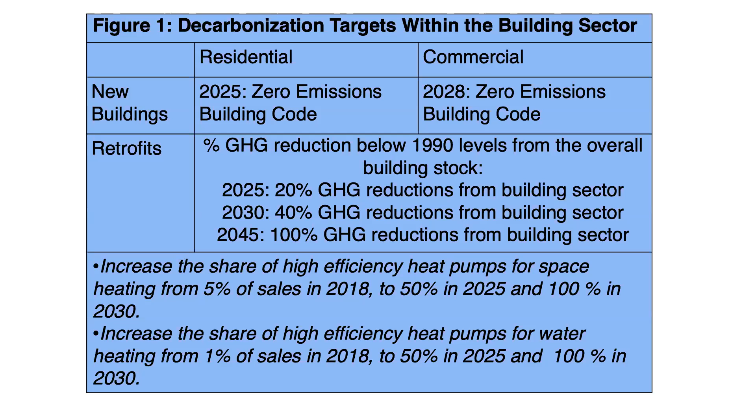Inherent in that was a recognition that two of the most important technologies, for space heating and for water heating, we're going to need to dramatically increase the share of sales for high efficiency electric units over gas units, so that by 2030, we can't really be expecting to be selling gas units in California and still expect to meet our 2045 carbon neutrality goals. So we adopted similar goals and recommended those to California for 100% of sales for the high efficiency electric models for those two end uses.

In exploring those numerical goals, we also recognized that a number of other more market-based goals were going to need to be achieved to reach those targets. You can see them up on the screen, but in short, it was significantly increasing awareness of the benefits of electrification, ensuring that customers and then delivery agents, such as builders and installers, are having a good value proposition from decarbonization. That the supply chain is a partner in this process, and that we're adopting clear standards with a viable timeline, so that the supply chain has time and the ability to be able to ramp up in order to meet those targets, and that we've gotten barriers to the supply chain out of the way as well.

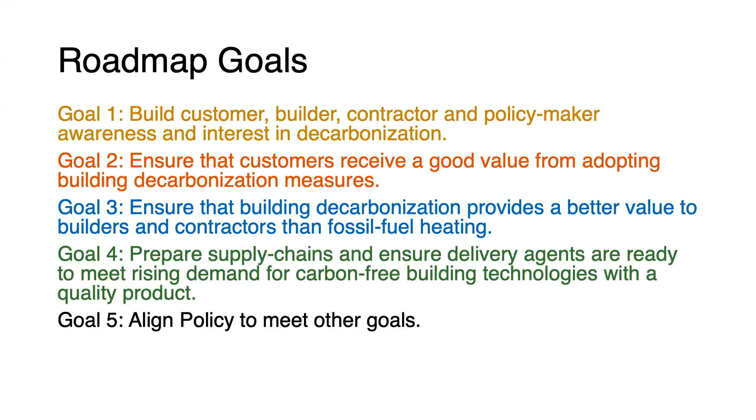Lastly, we're aligning all of our policies so that the four previous goals are able to be met and we don't have policies conflicting with each other. This webinar series fits clearly under that first goal, and it's one of the various attempts that the coalition uses in order to increase awareness. This webinar series is generally focused on professionals that work in this field in order to bring in some of the top thinkers, top doers, top companies and organizations that are working at the cutting edge of building decarbonization, to let them talk to the community about what they're working on and where we're going.

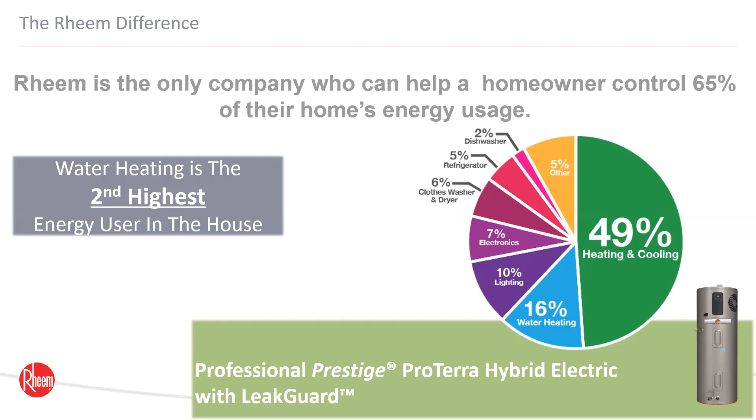Water heating - not the sexiest topic in the world. Consumers usually only consider their water heater when it leaks, so that's once every 10 years. But really a big importance should be placed upon the water heater because it is the second highest energy user in the house when you look at a national perspective.

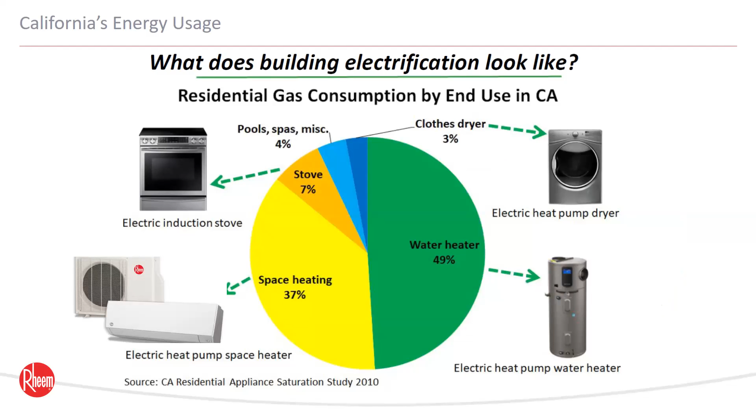When you flip it over to the state perspective, people move to California because it's nice - they don't need to run their HVAC very often. So all of a sudden, the water heat and the HVAC kind of flip. Water heating being the number one energy user in the house, now more importance needs to be placed on that technology to make sure they're saving money on their energy bills and aligning with the electrification goals that the state has.

Also, Rheem launched our sustainability goals last year. So we have a quick video just to explain what Rheem is doing in the marketplace and how we are partnering with our trade allies and with the builders on a sustainability message point of view.

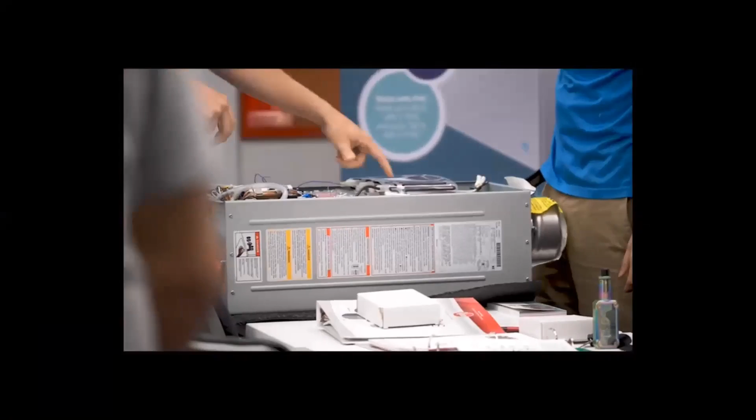At Rheem, we are proud to make bold commitments for 2025 to dramatically reduce our impact on the environment. We are committed to addressing the labor shortage and increasing training needs facing our industry, and we see a future with zero waste in the use and manufacturing of our products. That's why we are designing for zero waste. We are reimagining our products to slash greenhouse gas emissions, refining our processes to drastically reduce our carbon footprint and landfill waste, all while training plumbers and contractors on how to install, monitor, and maintain sustainable products to perform as efficiently as possible. From the very beginning, we've integrated sustainable thinking into everything we do. And as the leader of a global family of brands, we will deliver greater performance while contributing to something greater than ourselves - creating solutions that truly make a difference, delivering a greater degree of good.

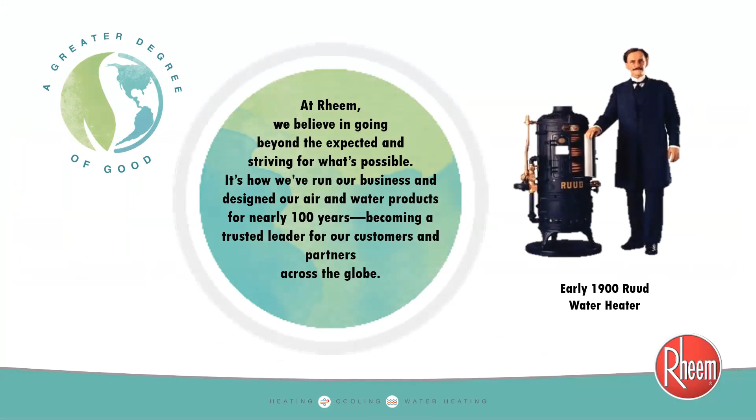So again, all those goals align with our 100-year birthday coming up in 2025, and pretty aggressive goals. Obviously we were on a good track.

We have 4 ILCs in the United States. Those are innovative learning centers where we bring in about 20 contractors at a time, providing 2 sessions a week to 40 contractors. We give them a hands-on experience with efficient product, how to install it, how to sell it, how to service it.

And of course, as COVID has caused us to react to that, we've pivoted quite well to a virtual platform, very much like this. So we have our master plumbers still have contact with thousands of plumbers every single month. They do that on rheemtraining.com or with our sales agencies or assets like myself, regional assets for Rheem.

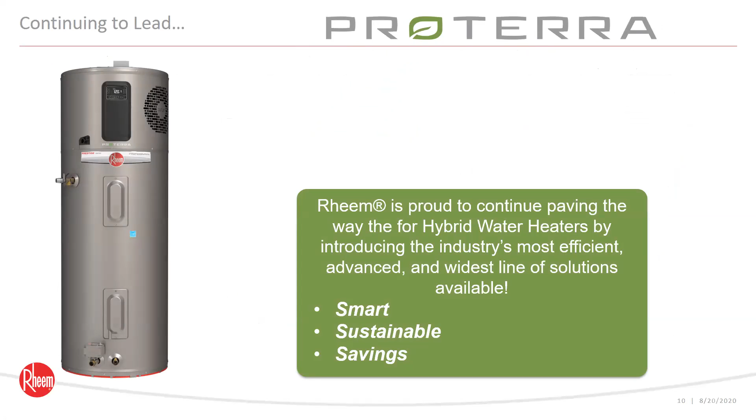So obviously this product aligns very well with our sustainability goals. It's going to reduce that carbon by 75% because it's going to use 75% less electricity. So really this product has 3 pillars of attributes that we want to point out. First, that it's going to be smart. It's going to be sustainable, and it's going to provide savings for the homeowner.

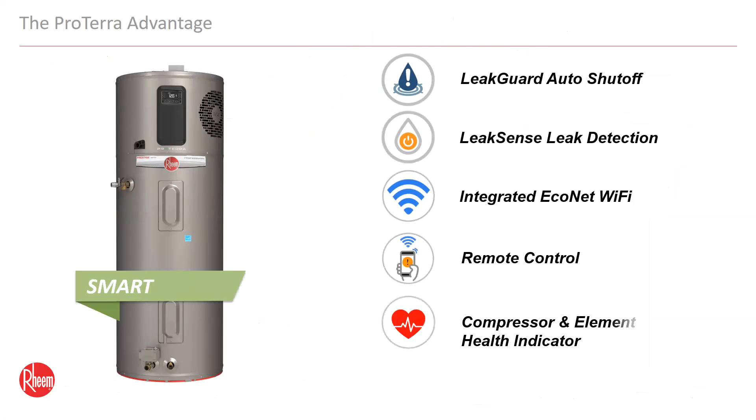So this is already our 5th generation heat pump water heater since 2009. We've obviously taken great steps in efficiencies and consumer features to make this product very desirable once a consumer gets wind of it. We've had leak detection in the past with our units. We've taken it one step forward and added an integrated shutoff valve. And really what that does is it detects the leak and prevents the leak.

We put integrated Wi-Fi in every single unit across the line. That way they can have remote control with their phone. They can get compressor and element health alerts. That way they can schedule planned service calls instead of emergency service calls, which tend to cost a lot more.

And a new feature is also the hot water availability. Homeowner can get on the app and figure out if they have enough hot water to take that last shower, which is a nice feature.

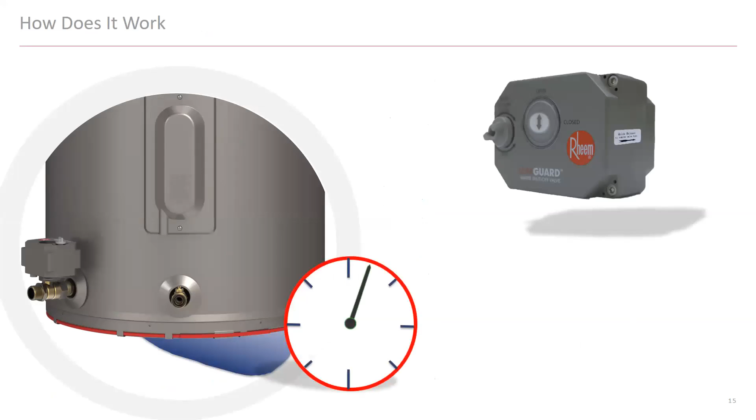So on the consumer side, anybody that's had a leak in their garage knows that that peace of mind is pretty big. So if we can actually prevent a leak in a tank to only about 20 ounces of water by creating a vacuum, it's something of value.

So this is really just to demonstrate how that works. Once water hits the drain pan and hits that cord that's wrapped 360 degrees around the bottom of the unit, it will turn the shutoff valve, have an alarm go off on the control board, and the homeowner will get an alert on their cell phone to come pay attention to that system.

So again, a good notification, good peace of mind for the consumer. And when we do consumer interviews, this is something that's very, very highly thought of.

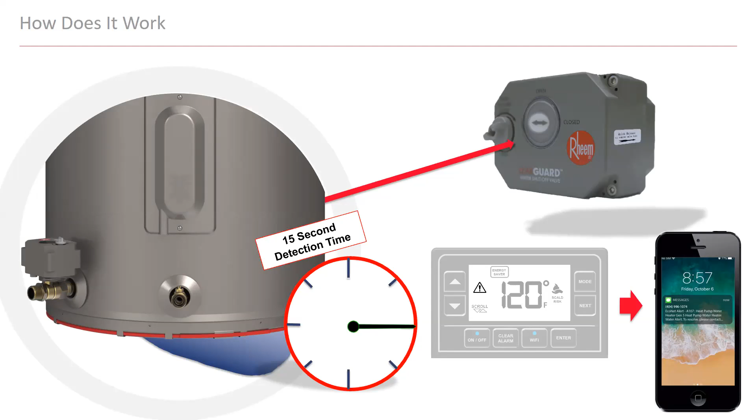We also changed the board. The previous board, which was a touch screen, tended to be a little bit harder to use, from our consumer interviews. So we changed it to a push button, which allows for easier access and functionality. So there's just some of the controls that it has now.

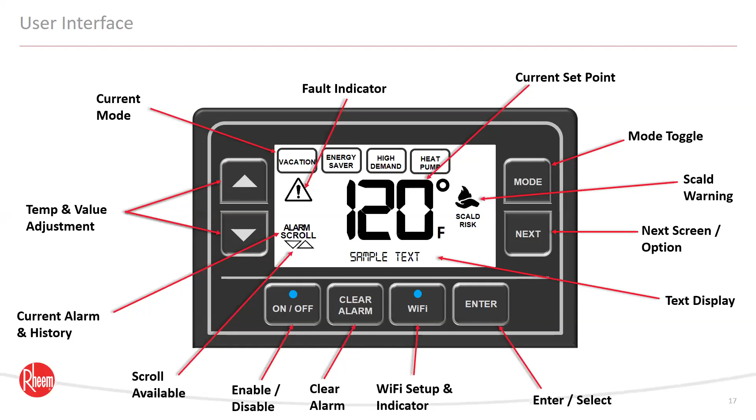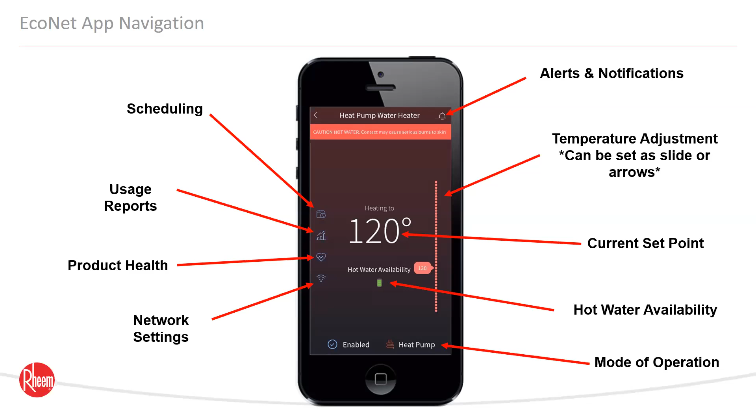On the app, we're continuing to update this app and be able to add features and benefits that the consumers are looking for. Of course, you can schedule this for time of use, which I'll get into in a little bit. You can get energy usage reports. You can change the mode and the temperature. And of course, you can get those product health alerts, which are pretty handy.

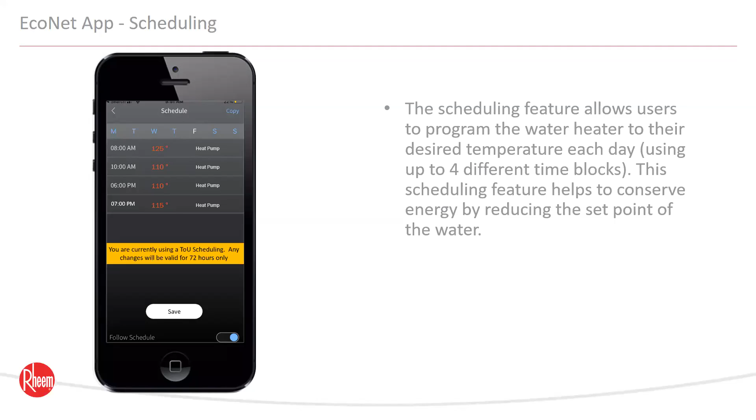Scheduling, California will be in some sort of time of use scheduling in the near future, if you're not already, if you have solar on the roof. But this is going to maximize really the savings for a high efficiency product by allowing the consumer to program it like their HVAC system. So they know that in between the times of 4 and 9, that electricity is going to be very expensive. So they can run their own in-house demand response program with the EcoNet app. Again, usage reports just show how much money they're saving on a weekly, monthly, or yearly basis. And this is what those health alerts look like.

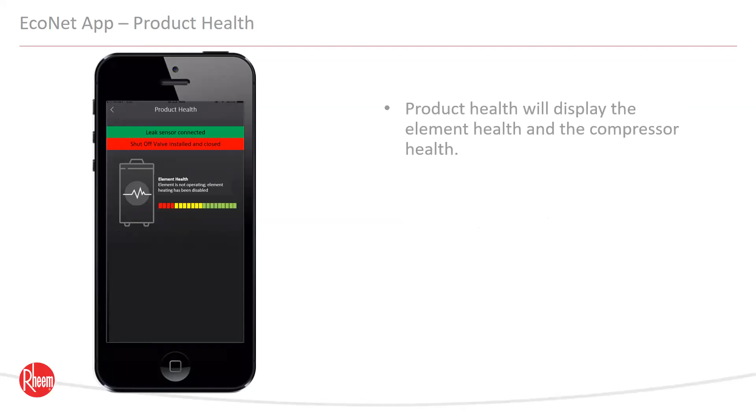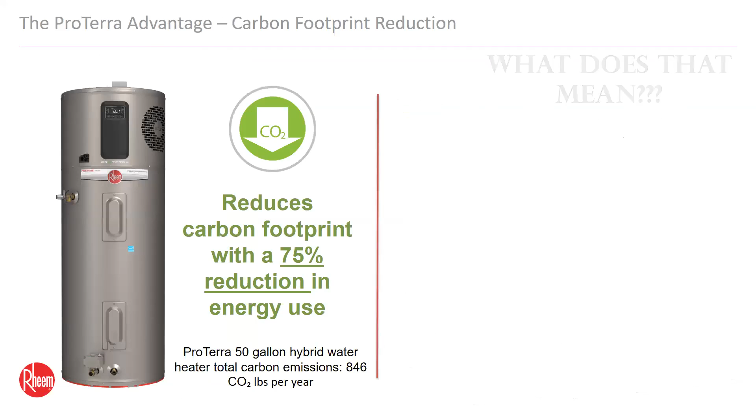Second pillar is that it's a very sustainable product. It's going to be the highest efficient product in the market with up to a 4 UEF. And again, as energy production gets cleaner and cleaner, both sources will drive down to zero once California is on 100% renewables.

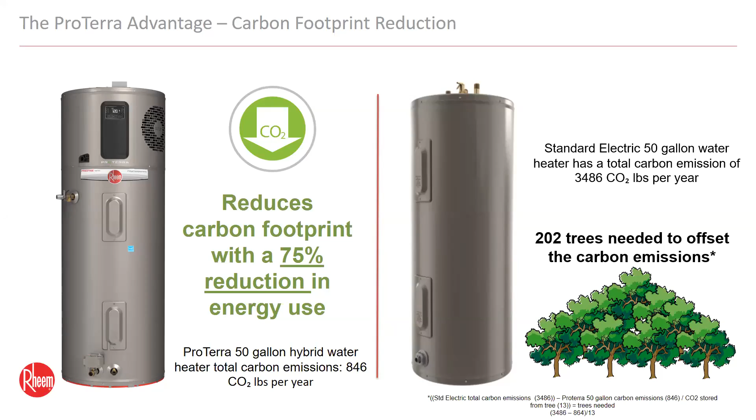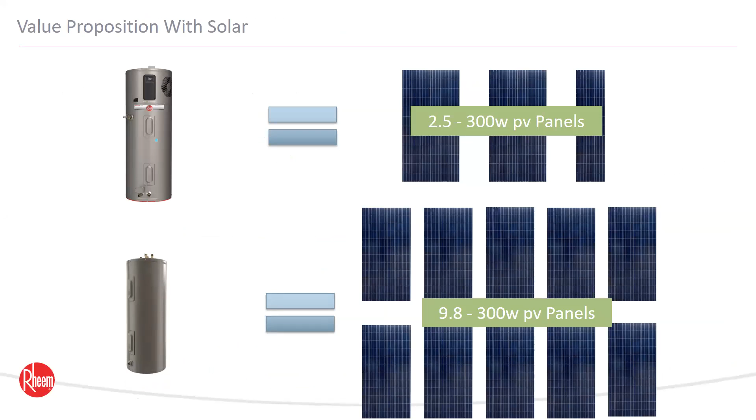When you take a look at it in solar panels, it's 2.5 panels to power a heat pump water heater as opposed to 10. So unless you're willing to pave your sidewalks with solar panels, this just makes a really easy transition, especially as homes are starting to require solar on the roof for new construction.

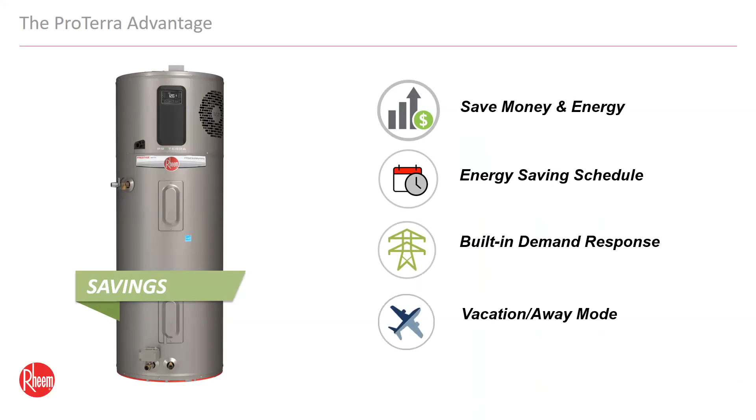And of course, the real reason people switch and change technologies is the savings it's going to provide. From a national perspective, just looking at a new water heater as opposed to a heat pump water heater, it's going to save on average, net national average, about $300 a year.

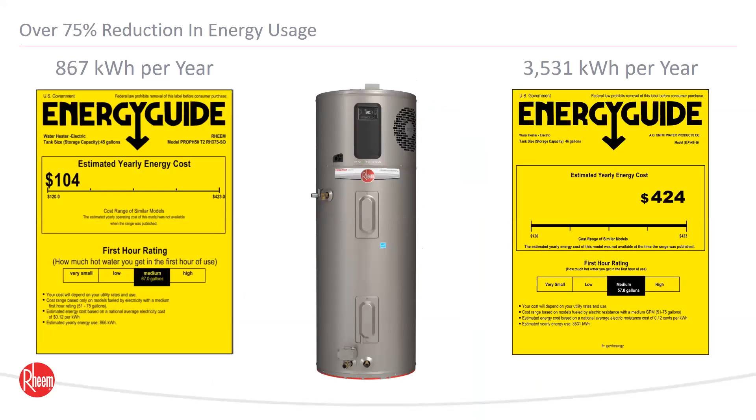Of course, California is not the average. Take a look at all technologies based on a low TOU rate and the gas rate that's out there. Because of its ultra high efficiency, this is the most affordable option to use.

Now there are some assumptions there. I am programming that water heater around time of use, and I had to do the same thing with the electric tankless and the regular tank type products. But this is going to offer a lot of savings from the get-go, not only for current users of electric tank type products, but also gas products.

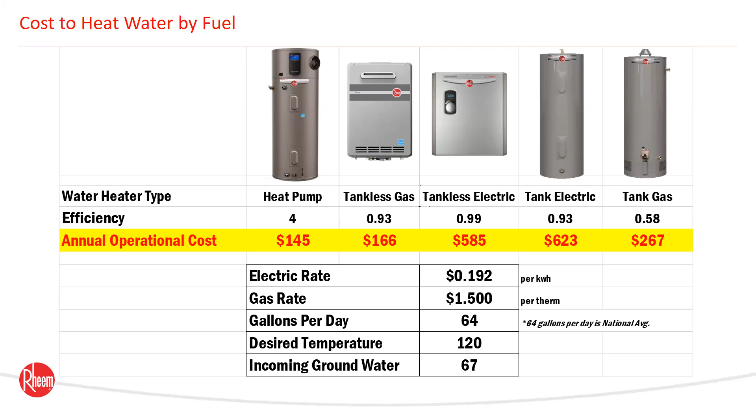If you have customers out there in propane territory, this is obviously a no-brainer for them. They're going to have an immediate impact on savings, and they should be able to see a break-even point within a couple of years by switching to this technology.

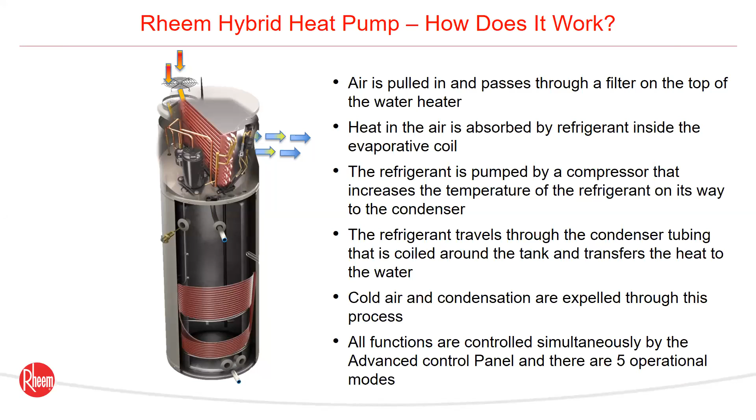That refrigerant is compressed and superheated, and exchanger coils are wrapped around the outside of the tank in order to exchange that heat. And that process of moving heat, not creating heat, allows that system to be over 400% efficient.

It's a very common process we use in a lot of different applications throughout the house and in our cars. So this is not a scary technology at all. This is something everybody touches, feels, and uses on a day-to-day basis. It's been around for a long time. If you look at how many refrigerators are sitting out in the garage keeping beverages cool, I bet there's lots of them, and they're probably 20-year-old refrigerators.

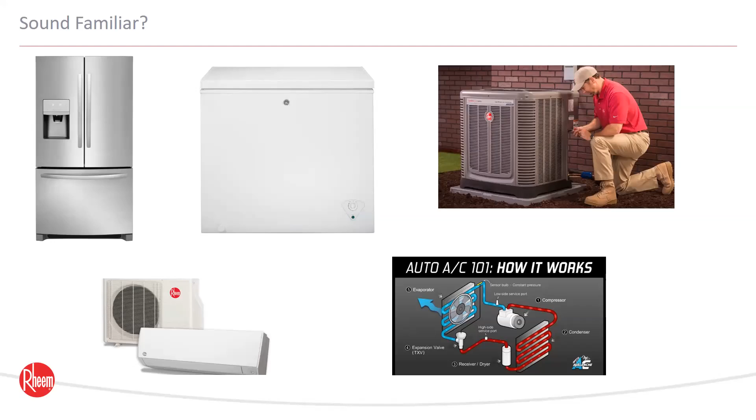Also new to the Proterra line is that we introduced a 40-gallon model, really keeping electrification in mind in California, especially in the multifamily segment. We made this model a couple of inches skinnier so it can fit into that closet. And with zero space clearances, we can get into more closets with tight installation footprints. If you are in a closet, we just ask that you either get a louver door or duct that product.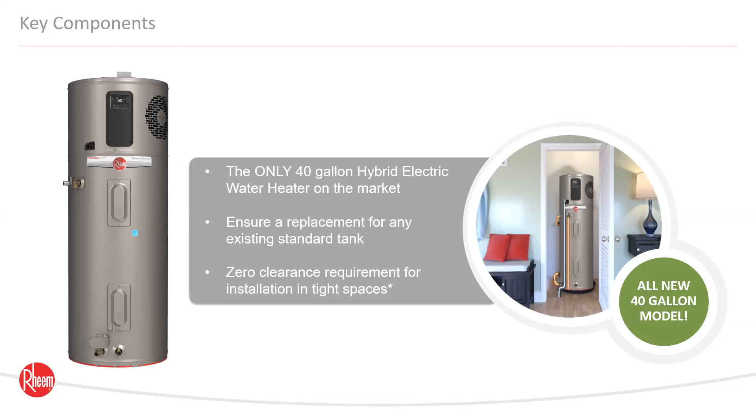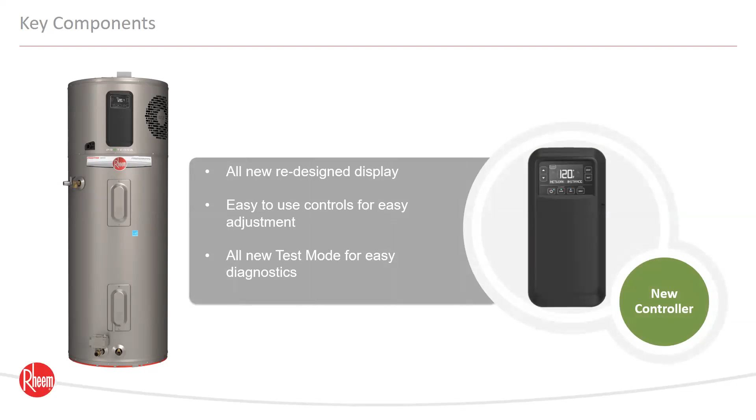We did, as I mentioned, redesign the board, and we have some nice test modes and diagnostics for the contractors to work on this unit. That way they're not carrying around large, bulky contractor manuals in order to service this.

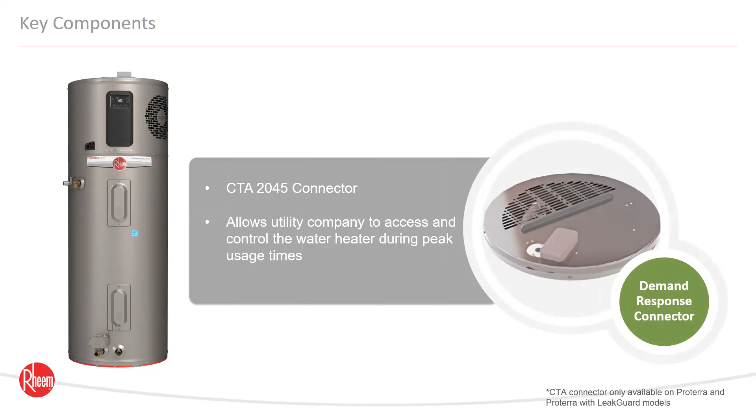New to this year on the Proterra and the Proterra with LeakGuard models is we added a CTA 2045 connector. This native port will allow a module to plug right into there to receive signals for a utility.

So we have a couple of different paths on demand response. We can use that CTA module as mentioned before, but we've also had in the market a lot of utilities go through our cloud-based system and communicate to the water heaters through EcoNet. That is Rheem's proprietary communication system, both on our water heating equipment and our HVAC equipment.

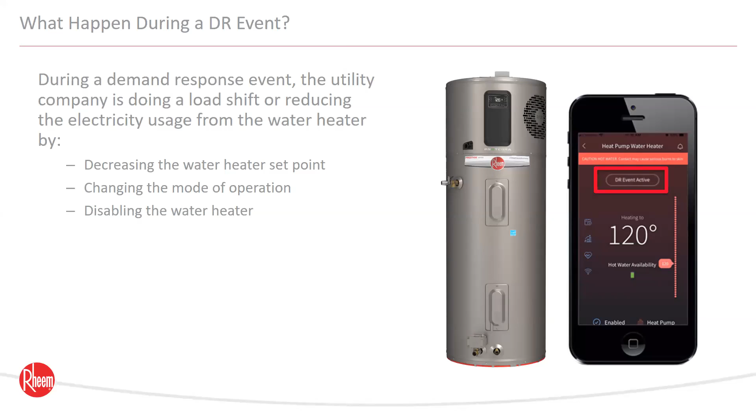During a demand response event, either through the integrated Wi-Fi with EcoNet, or through the CTA module, you can do a variety of different commands depending on what part of the day the utility is at, and what they need to do. So you can do peak shaving events, energy storage events, or grid emergency events, which really turn the unit into vacation mode.

Right now, I'm sure California would love to have this type of asset, because they can use it as a thermal storage battery—storing excess solar during the middle part of the day to avoid those peaks both in the morning and afternoon when people are using hot water. So even though it's increasing overall load, it'll be important for California to utilize this asset for the load exactly when they need it.

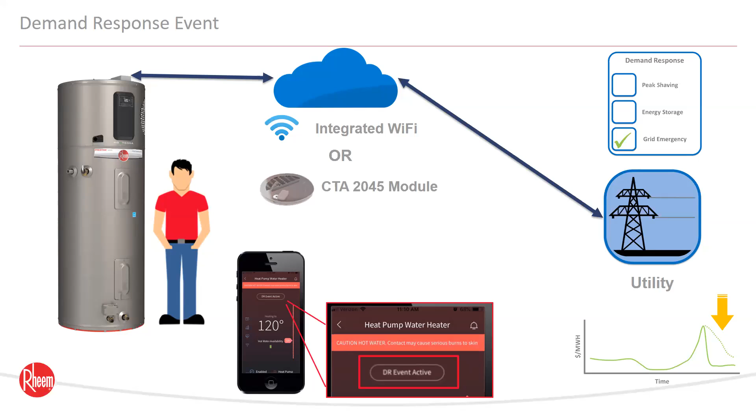We also have an integrated solution, JA13, for new construction. Basically, that allows a home builder to receive extra EDR credit in the Title 24 software to throw a schedule to a heat pump water heater. As long as a mixing valve is installed, they can throw that time-of-use rate in there, and the machine will go through load-up and shedding features automatically. The good part is, the homeowner never has to mess with this or enroll in a program—it's ready to go from day one when they move in. A good asset, and we're looking forward to seeing that in the Title 24 calculator later this year.

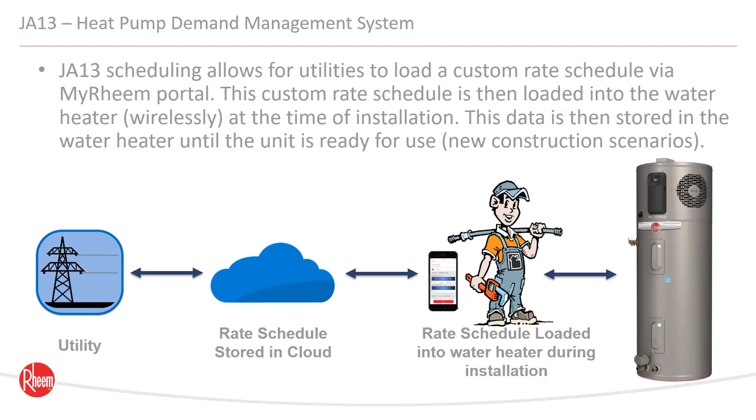Typical modes of operation: energy saver mode is what it ships in, so it's going to utilize primarily the heat pump, which can get up to a 1700 watt equivalent—very slow recovery rate, but very efficient. If there's a lot of usage on the water heater at one time, it can also operate with a 4500 watt element, so in that case we can get up to 6200 watts of recovery, which is more than a standard electric water heater. That's why we have higher first hour ratings than standard electric water heaters have.

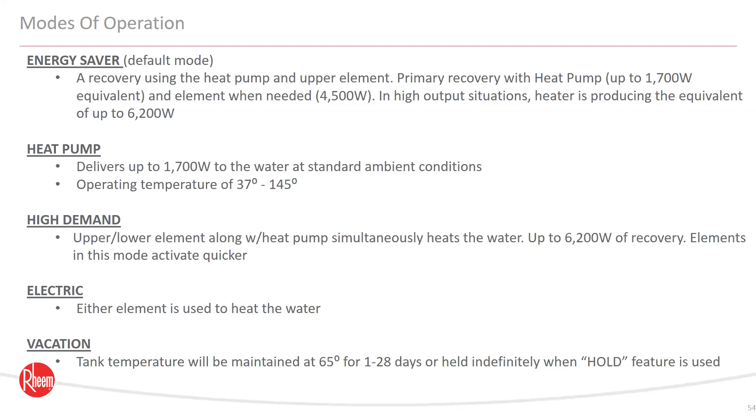We're adding more to the market, so we have a true good-better-best solution for the plumber to offer the homeowner, starting with the builder lineup. This is a NEEA Tier 3 rated product. It will have built-in Wi-Fi and JA13 scheduling, and the availability to add leak detection, which is something new. And of course it'll have that 40-gallon capacity.

Moving up into the product lineup with the Proterra, that's when you can add the LeakSense and LeakGuard, so you can have that shut-off feature. This is actually going to be a NEEA Tier 4 rated product, the only ones out in the market with that rating. Again, all these will be the quietest in the class at less than 50 dBA. And obviously the Cadillac is going to be the Proterra with LeakGuard, which has those features shipped in the box.

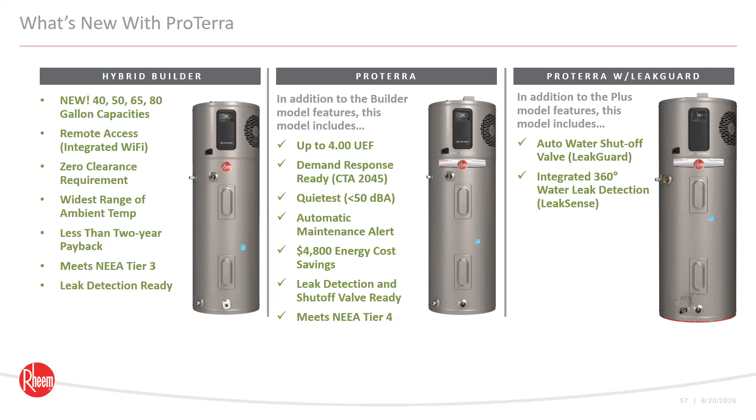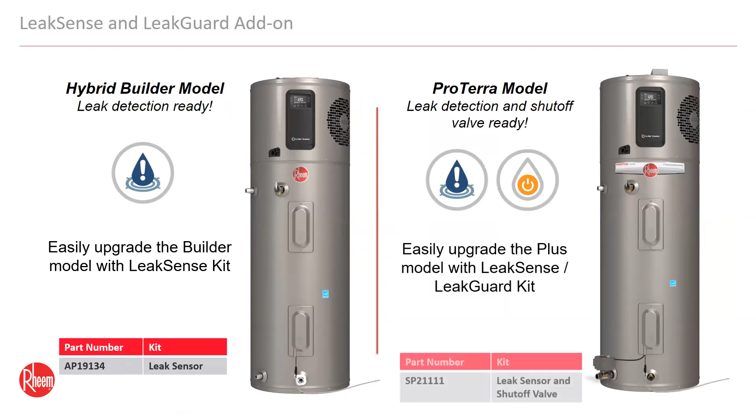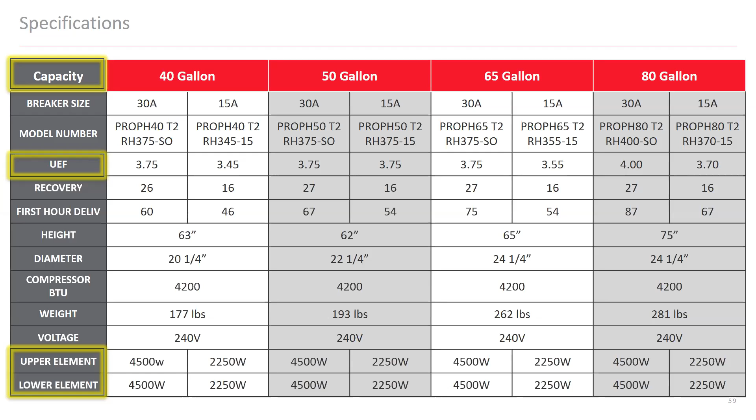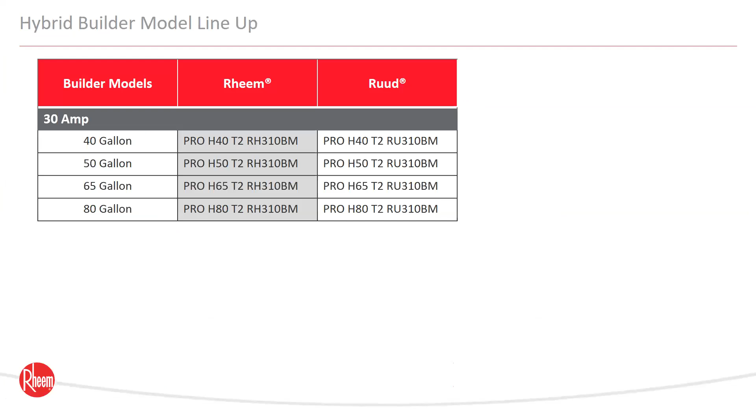Those simple add-on kits can be ordered online or purchased directly from the installer, and we have those kits already available. This is a bit of an eye chart because there's so much going on. In the Proterra lineup, we not only keep our standard 30 amp models, but we have 15 amp models available today, especially for gas-to-electric retrofits. We've seen a lot of that in multifamily applications where they may be energy constrained—often not even at the panel level in the unit, but at the transformer level outside the building. So that availability of only having a 15 amp service is important for them. And of course we have the builder models as well, so Rheem and Ruud each have four SKUs available for the distributor to stock and sell into the marketplace through the plumber.

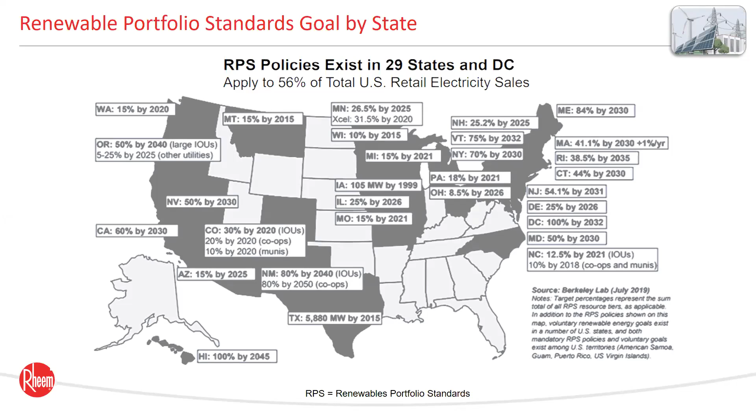Just to give a little background—this is kind of an old slide and needs to be updated—but you can see the writing on the wall: California is not the only state looking at electrification or some type of renewable program in its energy profile. Using assets like a heat pump water heater will provide the beneficial electrification they need to control their grids. And as we all know, SB 100 moves to a carbon-free economy by 2045.

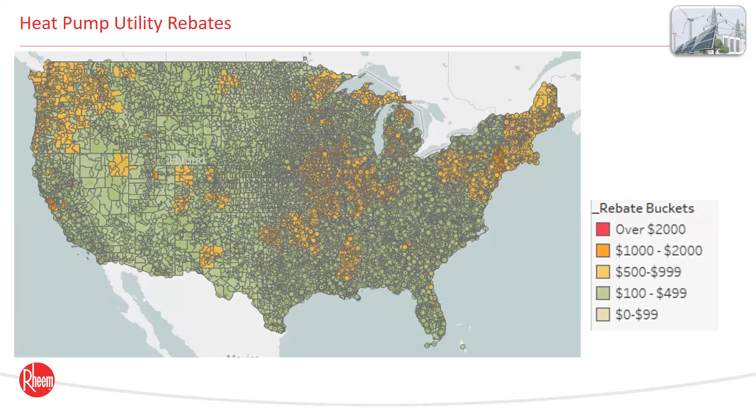Heat pump rebates—and I believe this is both heat pump water heaters and heat pump HVAC—as you can see, already blanket the country as far as rebates go. So from a utility perspective, this is nothing new. You can see those gold areas in the Northwest and Northeast where we see a lot of traction with those utility rebates really driving the market. This does need to be updated to reflect Southern California Edison's $1,000 instant rebate, and we should get that updated soon.

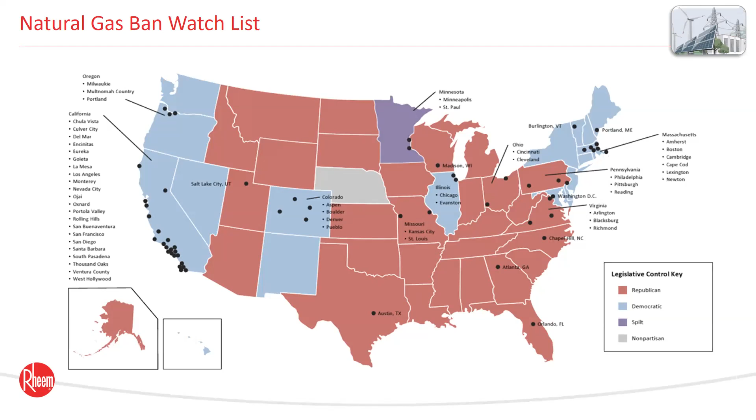This is, of course, not going unnoticed by the Natural Gas Association. This is their list of identified cities that are looking to either modify new construction codes to make it much harder to put natural gas into new construction. These are identified by the gas industry, and we're already seeing some of these cities fall and create that code either in REACH codes or in building codes.

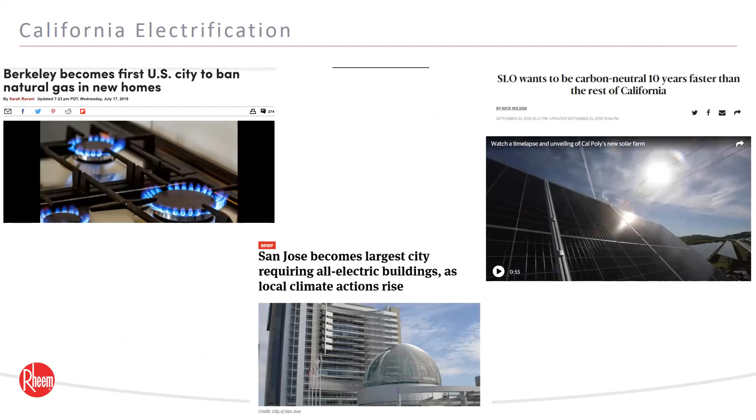Title 24 this year has been the first year that at least heat pump water heaters can be considered in a mixed fuel home. We kind of get equal footing from a condensing tankless standpoint. Moving forward, builders obviously need to put that electrical infrastructure in, even if they are not utilizing a heat pump water heater. But we're hoping, with the reduced infrastructure costs and install costs that a heat pump provides, some of these builders will start to be able to convert to heat pump water heaters shortly.

There's no venting required, so there's less trades when you're putting these heat pump water heaters in, and we're seeing some builders take note. Obviously, the extra JA13 credit will help push them over the edge, because there is a value to those EDR credits that a builder needs to have in order to meet code.

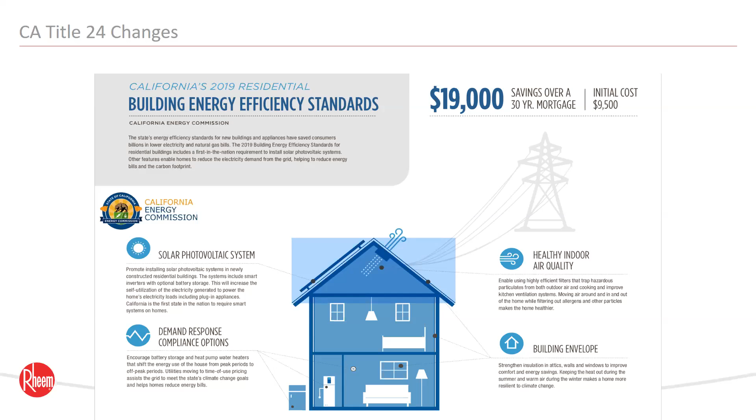And marketing—there's builders out there that market to an efficient home, either like KB Homes for the annual savings that it provides with its efficiency, or maybe it's a HERS rating, or an Energy Star rating. So there's lots of different benefits in having high performance homes being marketed to homeowners.

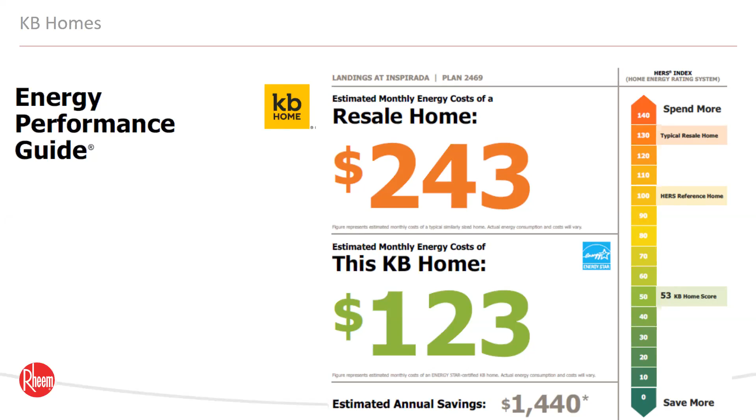So that's really what I had. I wanted to leave some time for questions, but as we see some of these markets fall, we've had some consumer interviews and plumber interviews. Most of them aren't necessarily aware of the electrification goals going on in California, but they're excited to hear more about them and learn about them. They feel like they want to pay it forward and do their part in decarbonization. So there is some light at the end of the tunnel, but obviously a lot of work needs to be done to educate the market on products like heat pump water heaters and heat pump HVAC, because consumers and plumbers just aren't very aware of them.

So with that, I'll leave it open to questions.